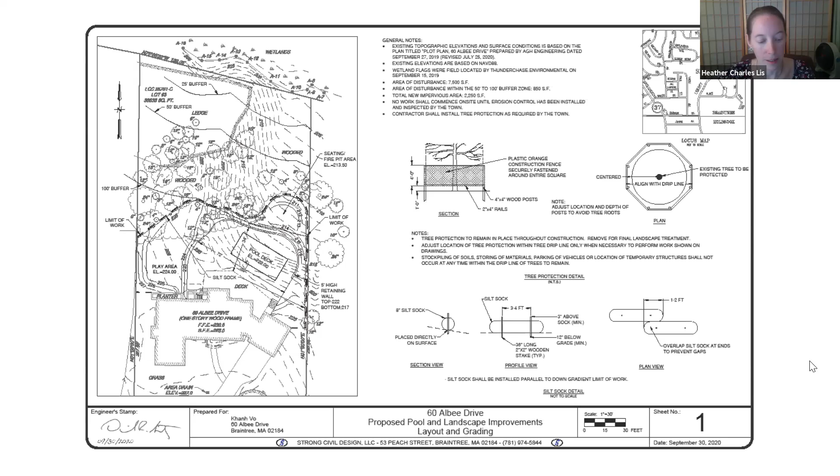Okay, so we'll move on to our next public hearing, which is a request for determination of applicability for the MBTA's commuter rail lines. The applicant is Keolis Commuter Services. For this item, I'll note that we are only hearing this under the State Wetlands Protection Act because the MBTA is exempt from local bylaws.

Is the representative here for that item? Yeah, this is Matt Donovan from FTC Engineers representing Keolis. Good evening, Matt, you can proceed. All right, if I could share my screen. We are not set up for that, but I have these maps.

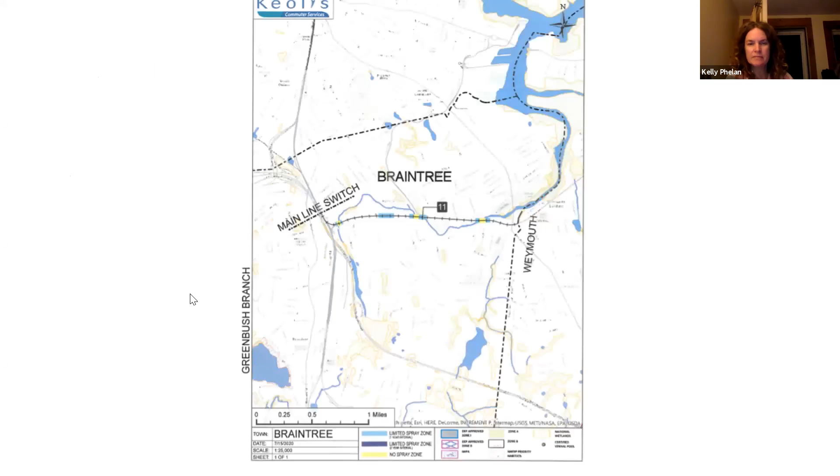Okay, that's okay. I just wanted to let the commission know that we do have a vegetation management website that was included in the narrative of the submission. It has the vegetation management plan, all the maps for all the different towns that the railroad runs through, and the yearly operation. We are required to send those to you via certified mail every year, but this is a good tool for anyone interested in staying updated.

So I can start. The RDA was submitted as required by CMR 11 and specific sections of CMR 10, which require us to submit the delineated maps to confirm the boundaries of the resource areas are accurate. The requirements are part of a 5-year vegetation management plan, which is designed to manage and control the vegetation necessary to keep the railroad and public safe.

As the plan is executed, great measures are taken to keep sensitive areas protected. The sensitive area restrictions are listed and described in detail in CMR 11.04, as well as Section 8 of the Vegetation Management Plan. The plan is regulated on all levels, from federal to state to municipal. As part of the 5-year plan, your commission, the Board of Health, the Board of Selectmen, and the Department of Agricultural Resources are supplied annually with yearly operational plans that are always consistent with the 5-year vegetation management plan, but go into more detail about the specific vegetation management activities going on each year throughout the 5-year program.

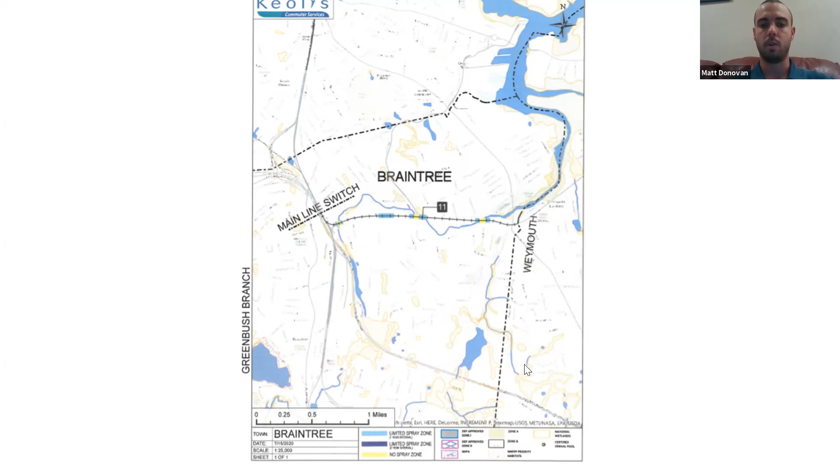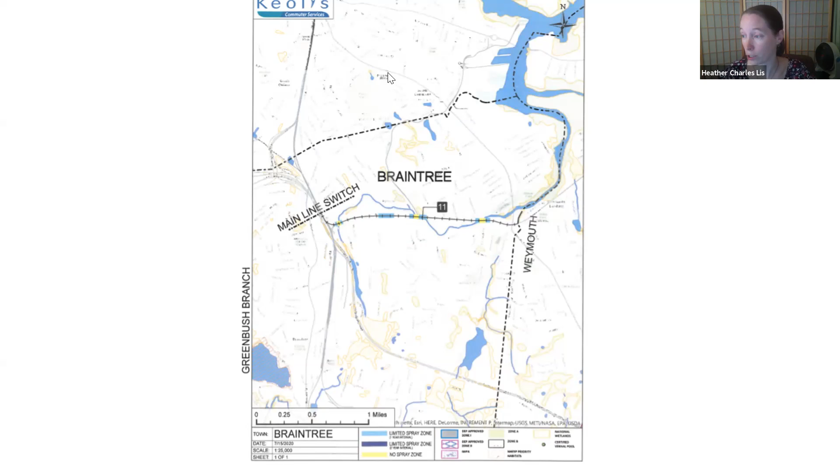Okay, thank you, Mr. Donovan. So we have not only a memo from Kelly on this, but we also have some guidance that came out recently from MACC and MSMCP. For folks on the call who may not know those acronyms, it's the Massachusetts Association of Conservation Commissions and the Massachusetts Society of Municipal Conservation Professionals. Keeping both of those in mind, I know Kelly, you laid out your recommendation. Is there anything else you want to add before we get into discussion? No. Okay, thanks. Commissioners, questions for Mr. Donovan or thoughts on the recommendation?

Yes, excuse me, could I chime in here as Commissioner Hayward. As long as they're going through the pesticide bureau, and they've got applicators that are certified, and they're working with the Department of Agriculture Resources. I know for a fact that the pesticide department has gotten much more difficult because I am a certified applicator and being audited for different things, and they're very much staying on top of people lately, where there were maybe some concerns in the past that some applicators weren't really paying attention and not staying up on their education and certification. So I'm feeling pretty good that Mr. Donovan's mentioned working with a lot of those groups right at the moment.

Great. Thank you very much for the input. Sure. Okay, any other commissioners?

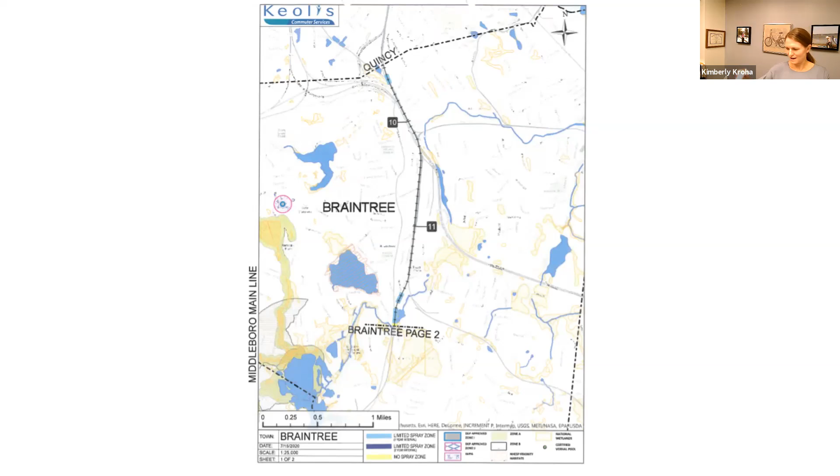No, I didn't have any questions with the recommendation based on the application in front of us. It looks like the only thing we can do at this point is decide whether the delineation will continue on; it's not anything further that we're technically being asked by the RDA. So I think the recommendation is positive 2... 2A. But I didn't see any issues with that recommendation.

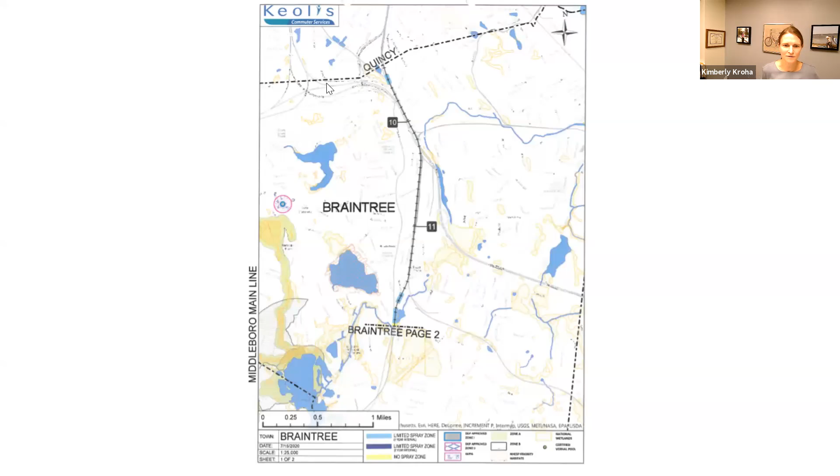Sorry, go ahead. What I would suggest is maybe a continuance. I don't know that an NOI is actually required, but it seems like it might be more efficient to allow an amendment, whether it's a new form or an update, asking us to make that determination with more detail on what exemption is being applied, or what the work is—basically how we're being asked to decide that a negative determination on the work itself should be issued.

I think it would be the same two exemptions that you guys listed in the -5 determination in 2016, which would still be applicable for this. One thing about continuing is we did this for 103 different towns, and if we continue for every town, we'd be into next year with these meetings.

So we really would like to get a determination, whether positive or negative, if that's okay with you. So what were the exemptions previously noted, or maybe you can just tell us what exemption you think this is?

10.036B is a presumption concerning herbicide application. Any application of herbicides within the buffer zone, other than as provided in 6A, shall be presumed not to alter area subject to protection. So you can list that exact exemption. Given the -5 determination, it gives you the opportunity to limit it to whatever exemptions you feel comfortable issuing.

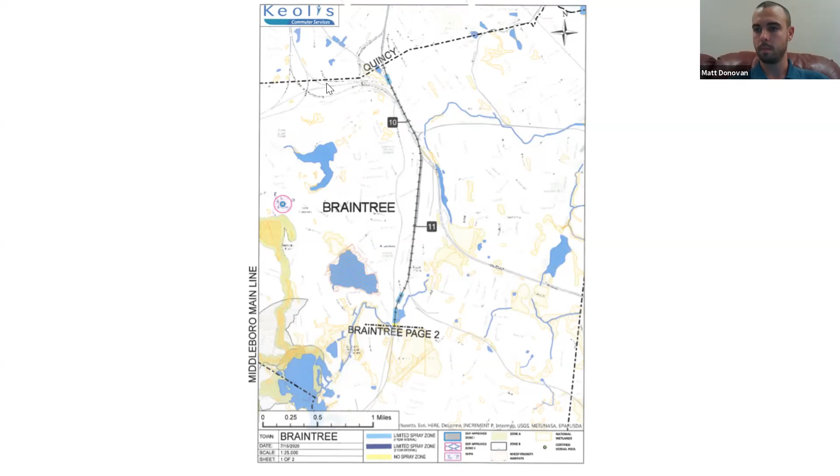You too. Okay, next we have another new request for determination of applicability. The address is 360, also known as 400 Wood Road. The applicant is HRP Wood Road LLC. Is someone here to present on that?

I am, Madam Chairperson, can you hear me? Yes, we can hear you. Great, thank you for your time, members of the commission. My name is Jim DeVellis, I'm a professional civil engineer representing HRP Wood Road LLC, an arm of Hilco Redevelopment Partners. There are a few members of the team on the meeting tonight as well, in case of questions.

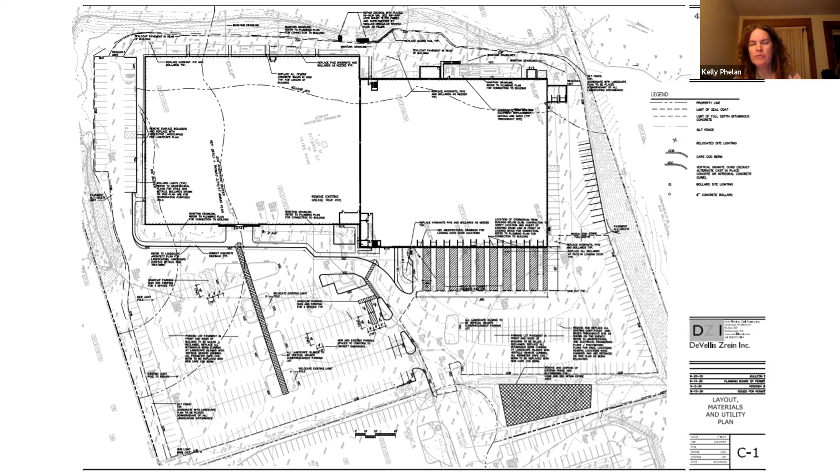Okay, other comments or questions on the plan? Can I just clarify one issue? I think the way it was worded was curbing and/or vegetated solution, because it does seem if there was a curb there, then the water would not be causing this erosion. It would be directed to catch basins further down the site. Is that? Oh, good point. Yeah.

So I guess the question then, for the representative, is are you also comfortable with having the curbs and berms as well as doing vegetation on the slope? The way it's there now, it kind of sheet flows from the pavement along the edge, and there's the low spot where it kind of brought into one area. If we had to pipe it, then we're adding a lot of excavation. We're adding structures, piping, new outlets.

I think what we can do is similarly what we did around the outside. We took the old Cape Cod berm, where it's not a full vertical, but it's enough to direct water along the edge, and we can bring it down to one central point and kind of over-design that riprap area. So it'll continue to go in the same area, but we'll make sure it's protected. What I want to avoid is bringing in structures and piping to bring it to a different drainage area. I think that's more problematic than the small area that goes in there.

But the way that the condition is written, I think it gives us the ability to move past tonight and then work with a solution with Kelly on this.

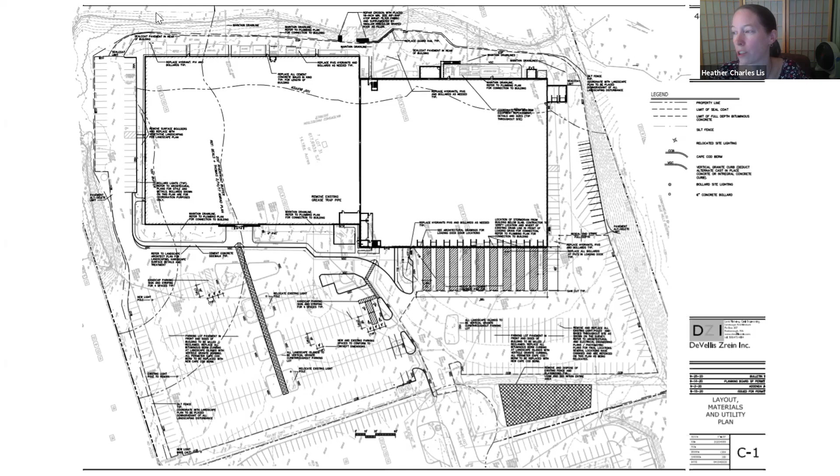My final comment is that I wondered, thank you so much for adding plantings to the islands, that's a really nice positive for the site and should look nicer as well. But in the area that's in the jurisdictional area, is it possible to add some more natives? Some of the species, although attractive, are mostly not native. So I'd ask if that could be considered. It's mostly one large island that's within riverfront area almost entirely.

It's a reasonable condition. We didn't provide the landscape on this, and I'm looking at the planting thinking that they're all native species. If not, I think it's a fair ask to make sure that they're indigenous and drought-tolerant. I can't remember off the top of my head. I know some of them are, like there's bayberry, but then there's some sumac, and I know that they weren't all, so it seemed reasonable to ask. Yeah, we can go back and have them change it if it's not indigenous or native to the area. Thank you.

Anything else from the commission? I have one comment. Sure, Kelly. That we should add a condition that we get the drainage maintenance record, so when they clean out the catch basins, we get documentation that it's been done. Sure, I think that sounds reasonable.

Thanks. Any members of the public wish to comment on this item? Okay, I don't see any hands raised, so I think we're okay.

Mr. Villas, would you be comfortable continuing to our next meeting so that we could revise the conditions and you could get answers back on those other items? The reason I brought four people is because we're under a tremendous schedule to get this done with tenants. I was hoping where we had the conditions, we could close tonight if that's at all possible.

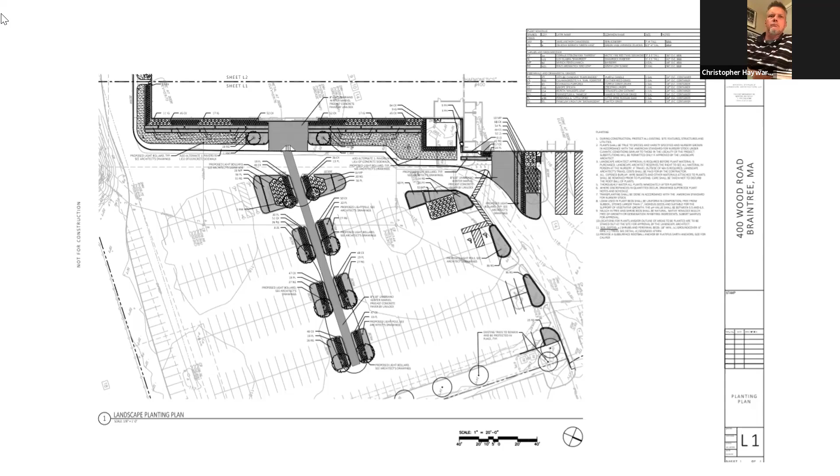Okay. Sorry, I'm just making notes as we go. Kelly, would you be comfortable with us moving forward if I'm being asked to come up with some conditions on the fly here?

I'm okay with that, but I want to make sure that you're comfortable as well and the commission's comfortable. I am, and I remember the other site, I probably should have thought of this before, but I can just pull the condition that we used on the seal coat for a site we did, this came up recently. Thank you, because I just didn't think of it soon enough to dig into my own files.

Okay, anything else from the commission on this path forward? Okay, so why don't I just read off a couple of potential additional conditions while Kelly's searching for the seal coat language.

So let's see, we'll add after draft condition 4, before condition 5 which should be the last condition, a condition that hoods and oil absorbent pillows shall be added to catch basins if not already present. And then next we can say maintenance records for the drainage system shall be provided to the commission.

This is not part of the condition, but I feel like we should indicate that catch basins need to be cleaned out if they have not been recently. Typically the requirement is for catch basins on a site like this to be cleaned out four times a year. I don't know if there's an O&M for the site, but maybe I'll continue that condition to say, if maintenance has not been completed within the prior 3 months, maintenance shall be completed prior to the end of construction.

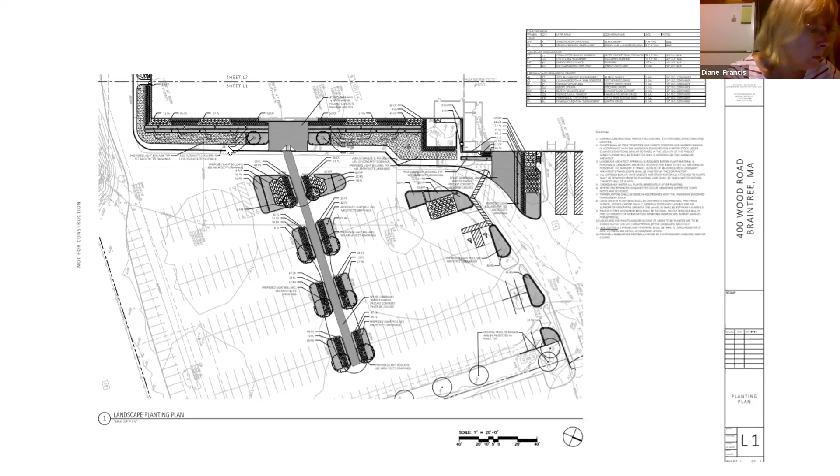Is there a second? Commissioner Hayward seconds. Commissioner Crowe, aye. Commissioner Albrecht, aye. Commissioner Francis, aye. Commissioner Williams, aye. Again, 6-0. Thank you so much, everyone.

Can I just add, now that you've already voted, I wanted to say this was an expedited process. I wanted to thank Kelly. She did a great job on all the paperwork, meeting us out there, and jumping through the hoops on the advertisement. Not many agents jump like that so we can get pavement done before the winter, and we all appreciate that.

We really are grateful and appreciate Kelly as well, so thanks on our behalf for your nice comments. Yeah, we second that on behalf of ownership. Thank you, everybody, you've all been great to work with. You're very welcome, good luck with the project. Thank you, have a good night. Good evening, good night.

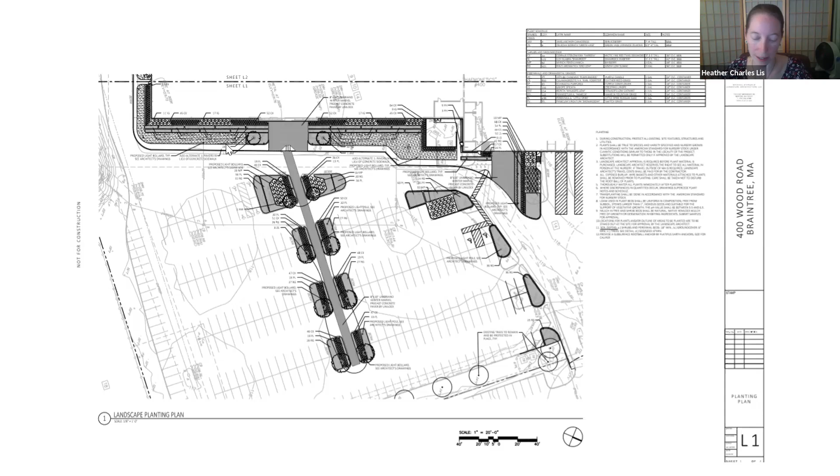Our next notice of intent that is on the agenda has requested to continue. This is for DEP file number 8-683, 40 Arnold Street and 71 Adams Street.

Kelly, do we need to vote on this since it's actually on the agenda? Did that come in after the agenda published, or did you get a request in writing? I did get a request in writing, so it's okay, we don't need to vote on it.

Thank you for clarifying. Finally, we have a continued notice of intent for DEP file number 8-682 for Gordon Road and Watson Park. The applicant is the town of Braintree. You recall at the last meeting we issued one order of conditions for the same site, for the marsh restoration and shoreline stabilization work. This is specifically for the berm work.

This was continued to allow time for conditions and a few final items to be resolved. Is the representative here, and if so, do you want to add anything? Woods Hole Group is not here tonight. All right, I hadn't checked. I didn't think so.

I'm very pleased with the two issues that were resolved with regard to the memorial bench and tree and the plantings. Thank you to everyone who helped resolve those, it's much appreciated. Kelly, did you have anything to add beyond what's in the memo? No. Do any commissioners have any other questions or comments on the project or the draft conditions?

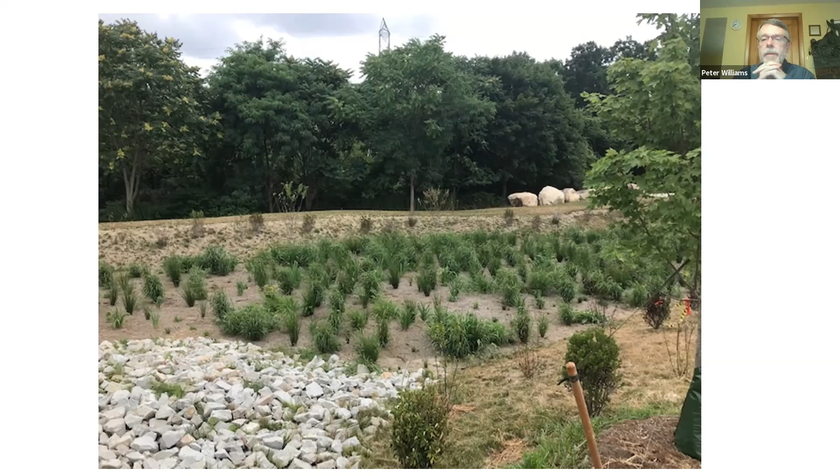You reminded me of a question I had, not specifically on the CR, but are there paths at all through this particular area now? No, the only way to really get in there is to walk on the sewer easement. Okay, which I haven't seen, it doesn't look like people are doing that. Is it otherwise in good, decent shape, in terms of invasives, trash, or illicit activity? That's what I mean, it's so surrounded by houses that there's no one who's really going in there.

Excellent. All right, anything else before I make a motion on this one? Okay, nope. So I would make a motion that we approve the conservation restriction for the Cedar Swamp. I'm just looking to see if I need to be any more specific with the location—specifically off Plain Street in Braintree, obviously.

Can I make—is there, as drafted and as amended during this meeting, to include Peter's amendment. Is there a second, Commissioner Hayward? Second. Okay, Commissioner Crowe? Aye. Commissioner Albrecht? Joyce, are you there, Commissioner? Sorry, I had myself muted. Aye. Aye. Okay, Commissioner Francis? Aye. And Commissioner Williams? Aye. Okay, it's unanimous, 6-0-0. Well, thanks for making me feel better, Joyce.